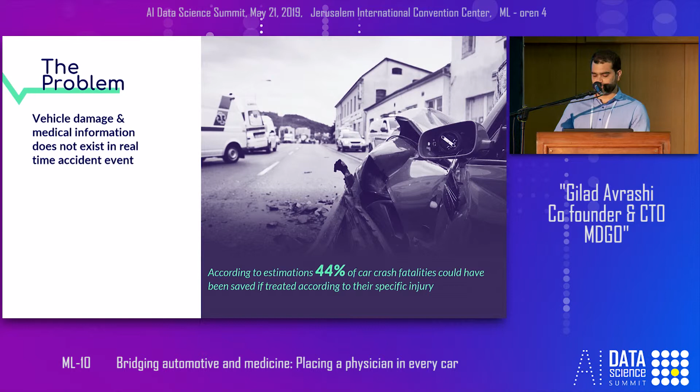In fact, there was research two years ago. They gave doctors, traumatologists, pictures of vehicles and asked them to tell whether the person inside should be evacuated to a level 1 trauma center, which is the highest ranking of trauma treatment, or not. In other words, whether the injury is severe or not - the accuracy was 50%, so it's like a coin toss.

And the other thing that we know is how the person looks like. But unfortunately, as cars are more and more safe and you have active safety features inside the vehicle, the trauma is less penetration and more blunt trauma and internal damage.

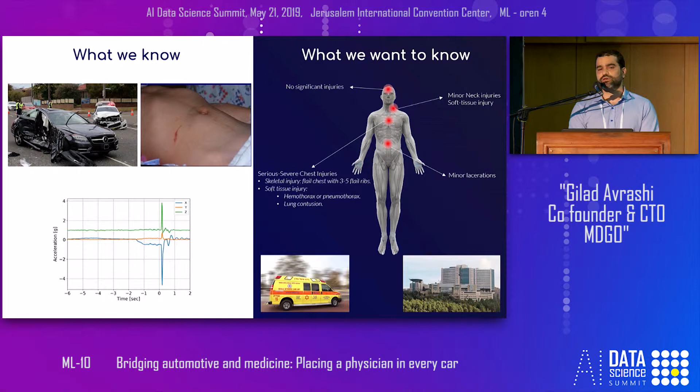So this is the main approach of MDGo. We utilize the sensors inside the vehicle, so you saw acceleration data, which is one of them, but also seat occupancy, vehicle sensors of any type, temperature, and so on.

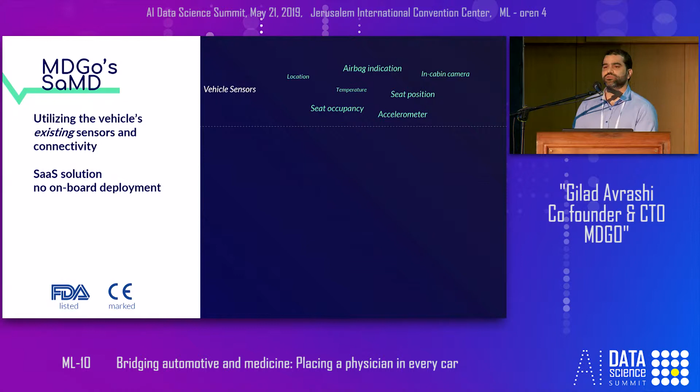We use the existing connectivity of vehicles, and vehicles today are luckily more and more connected in real time. We are a SaaS company, so we do cloud processing of this data that's coming out of the vehicle during a crash, and we give insights both for insurance companies and obviously for trauma, whether it's the EMS.

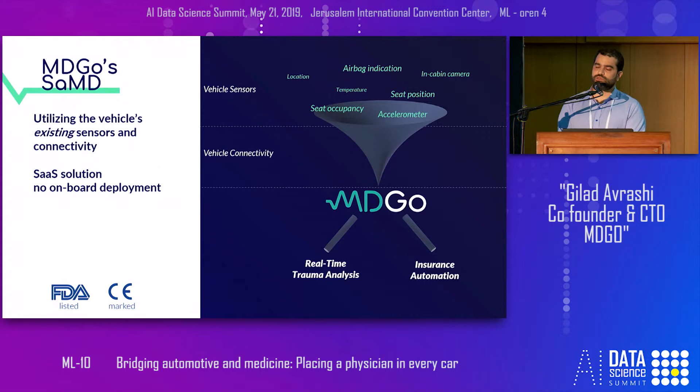Here in Israel, we work with Magen David Adom and hospitals. So we're going to focus on this left branch for the rest of this talk.

We're not the first ones who try to look at data coming out of the vehicle and try to predict what will be the injuries. Since the 1990s, there were a few researchers and a few products that did that.

Basically, the approach was: let's look at the physics of the vehicle crash and try to predict the injuries. So they found out that delta V, which is the velocity that the vehicle has gained or lost during the crash, is the best predictor of what's going on inside the person.

So they looked at medical reports, they looked at delta V from different crashes, and did this regression model, which basically tried to predict the probability of severe injury given delta V. That was the best practice in the past 20 years.

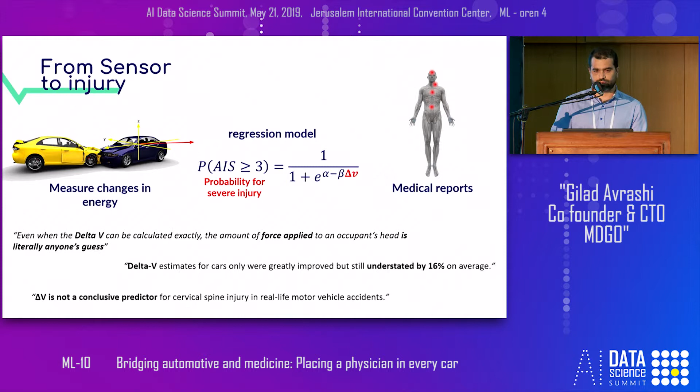The problem is that even though delta V is a good predictor, it's not very good. You see a few quotes here from different researchers. It says, for instance, the force applied on the occupant's head is anyone's guess given the delta V. So it's obvious there is still a problem, and you can't be very organ-specific using delta V.

So what we thought is, what if you can measure the human rather than the vehicle? Because the vehicle does not say much about the injuries. So we started to look at the options.

The first one is in-cabin sensors. This is very intuitive: if you have monitoring inside the vehicle, if you have acceleration sensors in the headrest, if you have an in-cabin camera looking at the person, it'll be very helpful. The problem is that they are not around yet.

And we wanted to solve this problem right now. The second thing is that they don't actually measure forces. It's very hard to measure forces in real life during a crash.

So we looked at the other option: what are the existing sensors today? And we got back to square one, because the existing sensors today, they measure the vehicle. So we understood that there is something else that has to be done, and you know what's coming: deep learning.

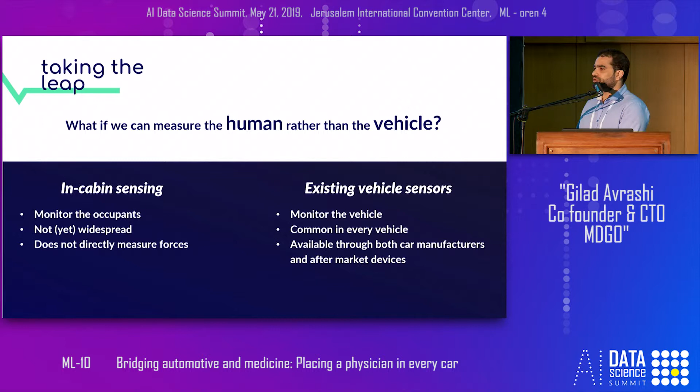So what deep learning can be applied here? So we... that was a spoiler. So we looked at crash tests.

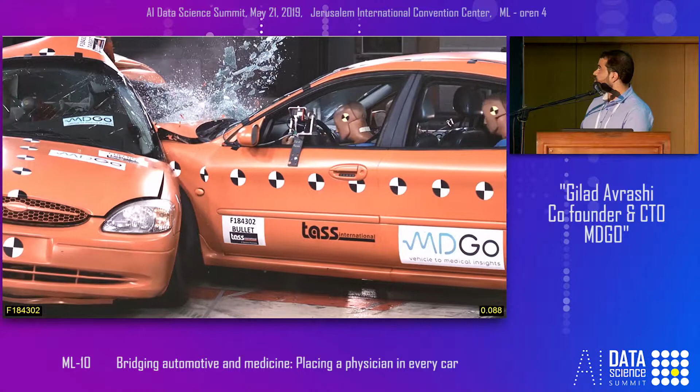This is a crash test that we did half a year ago. And the good thing about crash tests is that it holds both data: the acceleration and exactly what happened to the dummies here. So, meet the data.

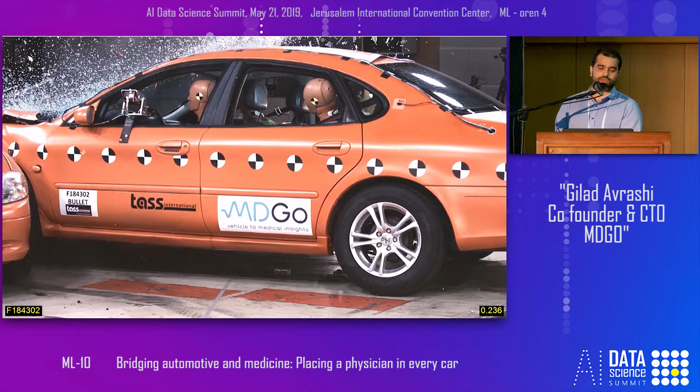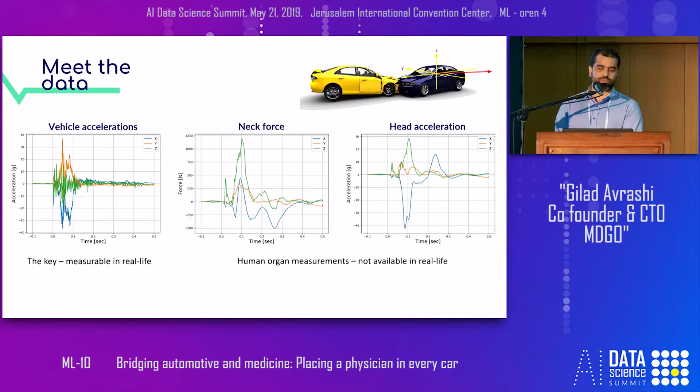So basically, this is the approach. We say that in a car crash there are actually 3 collisions. The first is the car colliding with whatever is around it, so a barrier, a tree, another car, or whatever. The second collision is the person colliding with whatever the surrounding is.

As cars are more and more safe, the points of contact are more predictable because you have the airbag, the wheel, the curtain airbag, the headrest, and so on. That's the second collision that we try to measure using deep learning.

What you can see here on the right, the blue curve is what we call the crash pulse, the acceleration of the vehicle. The pink curve is what is measurable on a dummy. And what we try to do is predict it using the blue curve. So that's pretty much the idea.

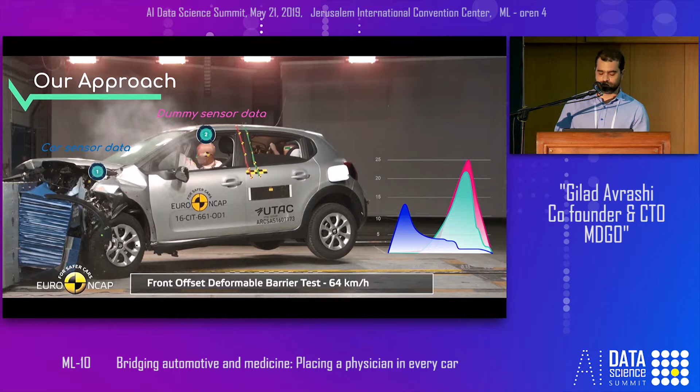The third collision is the trauma, the internal organs colliding inside the cavity of the body. We do this using state-of-the-art biomechanical models. I'm not going to go into that.

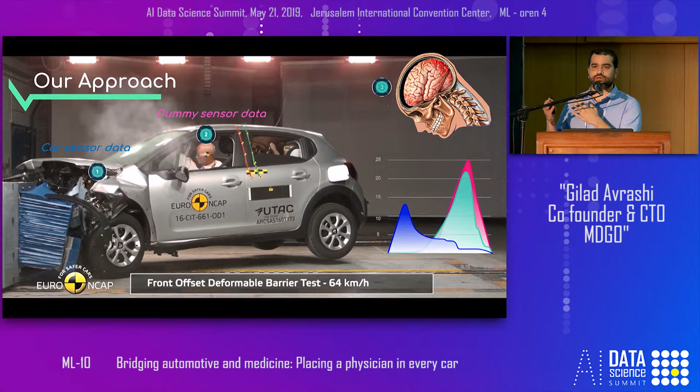I'm going to focus on what we call virtual sensors, trying to predict dummy sensors using the crash pulse. So not surprisingly, we turn to LSTM. We use the crash pulse together with crash attributes, because there's other data that should be taken into account, as crashes are different from one another.

For instance, a frontal crash is significantly different than a side crash, and that should be taken into consideration. We predict what we call virtual sensors, which I talked about earlier. So this is the basic idea, and that's the deep learning that we do.

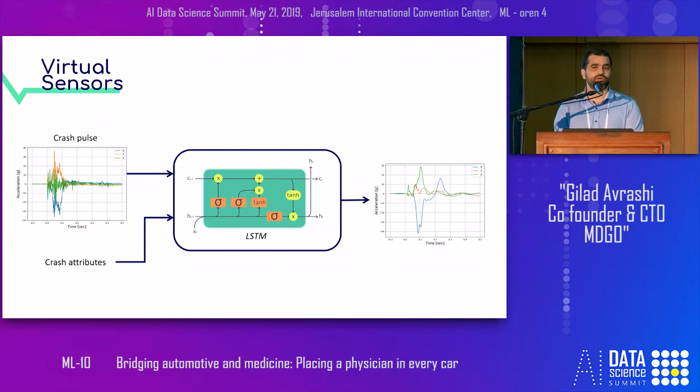But the question that should be asked right after that is, how well are we doing, and how do we get the data to do that?

So let's talk about the data, because obviously you need a lot of crash tests, and crash tests are very expensive. I can tell you that firsthand. So the first thing that we looked at are open databases of crash tests.

Because at least in the US, if you're a car manufacturer and you want to do a crash test, the crash test is recorded and it's open to the public. The bad news is the regulation requires only 3 to 4 scenarios, specific velocities, specific barriers, so the diversity is pretty narrow.

What you do get is diversity in the car models. So we understood that we have to look at more examples, more angles, more velocities, and more human body models. So we took it in-house.

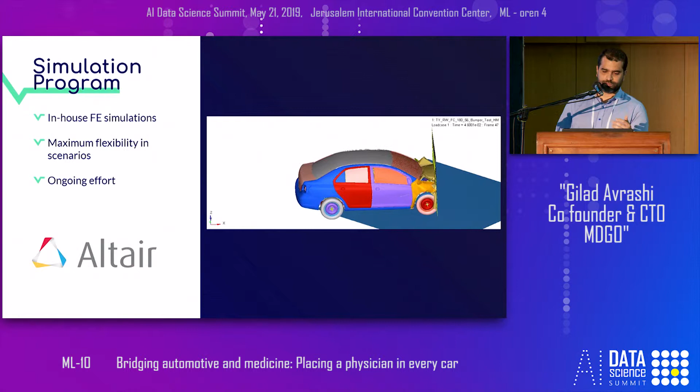The first thing that we did is we purchased a license for finite element modeling of vehicles. This allowed us to do pretty much whatever we want in terms of scenarios, under the envelope of the simulation capabilities. This is a very simple example of a simulated crash with finite elements.

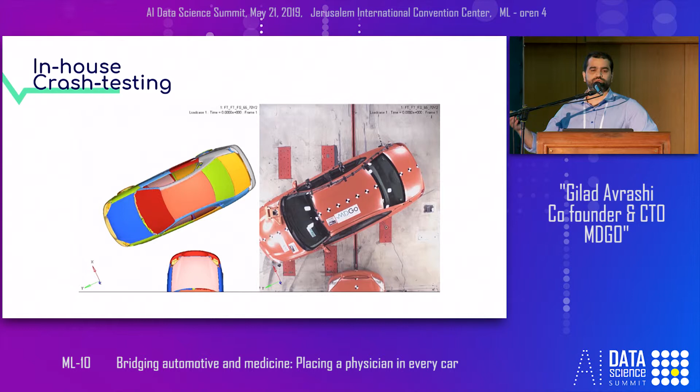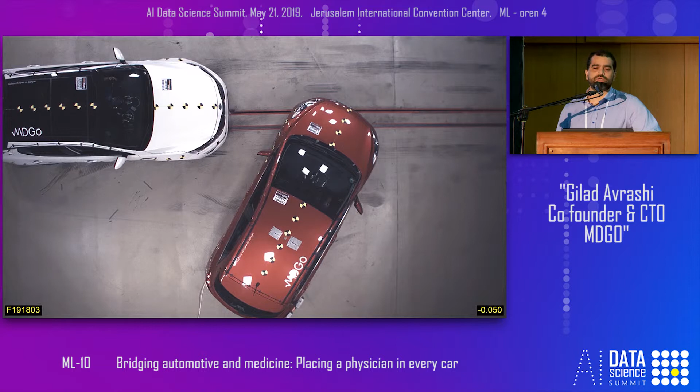The second thing is we validated some of the out-of-scope simulations with crash testing. This is the one that you saw earlier, a crash test that we did two weeks ago in the Netherlands in order to look at other attributes of a crash. This is far from what you see in the regulation scenarios in terms of the angle and the velocity.

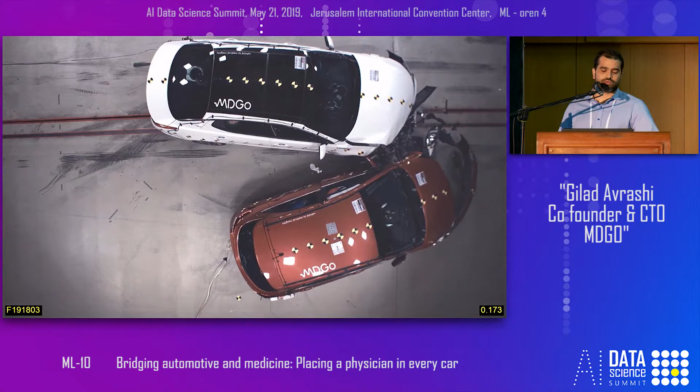What's interesting is the white car here. We put in a baby dummy, because when you see crash tests required by regulation, it's always the 50th percentile male. So in this case we used both a dummy of a baby and a woman. But because the scenario is out of the ordinary, we got results, which you can see here on the bottom, that you never see in crash tests required by regulation.

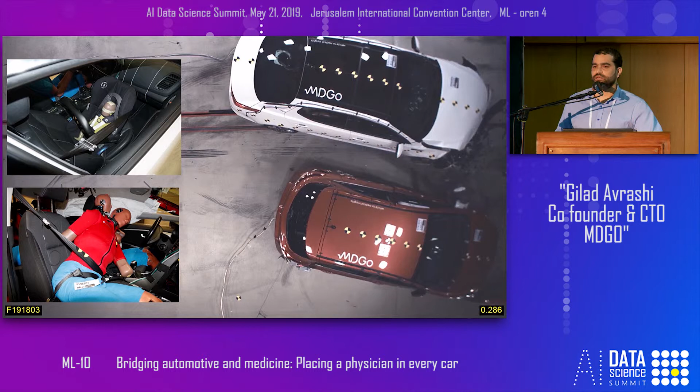You see that the passenger on the red car got tossed to the side, which is another type of injury than you can see in the usual crash tests. So when ideas meet real life—up until now it was all very nice in theory, and we looked at lab results and very good quality sensors.

But when we talk about what's available today in terms of sensors and connectivity, you start to see things that are less than optimal. If we compare crash tests from lab to real life, for instance, the sensor location in crash tests is welded to the center of gravity in a very rigid place, which is very comfortable.

But when you talk about aftermarket devices or even OEMs, car manufacturers, they do not necessarily put those in these convenient locations. Telematics companies, or companies here in Israel like Ituran, Pointer, Trafilog, to name a few, give you an aftermarket device with a sensor placed on it, usually in weird places like the glove box, the dashboard, or whatever.

So you have to do some kind of domain adaptation between what you know from the crash test and what's going on in real life. The sampling rates are much lower. This is why we have signal processing people, but also we use machine learning to do some kind of adaptation, because we lose a lot of data.